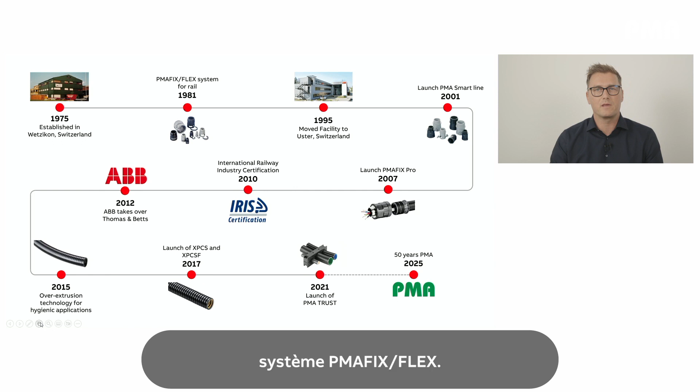ABB PMA, with the former name of PMA Electro Ltd, was founded in 1975 by Werner Lanz. At that time, the company was founded not far away from here in Wetzikon, and the name means in German Produkte for machines, Maschinen, and Apparatebau equipment. Werner Lanz was not only the founder of the company, he was also the key driver of development of the first PMA flex system. The patent for this product was made already in 1977, and the product was introduced to the market in 1981. This system solution, which was unique at the time, has become established in the market and has been adopted many times by other market competitors.

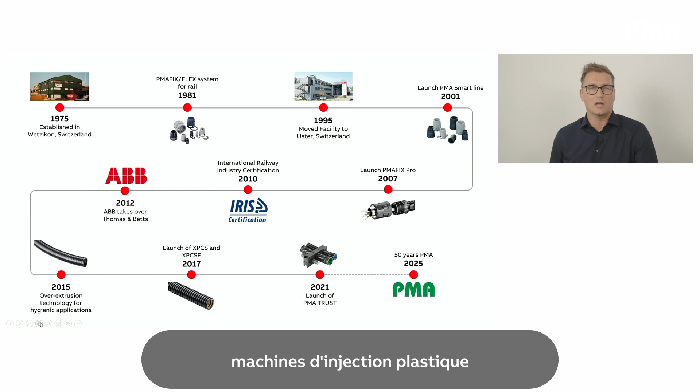In 1987, the company had about 20 employees and grew so fast that in 1995, PMA had to move to another building, which was actually then the building here in Uster, where we are still located. The property then was not as large as it is now. We had fewer buildings, and the company was growing over the years. The machinery in 1995 consisted of 7 injection molding machines and 4 extrusion lines.

PMA has then changed ownership several times over the years. In the beginning, Mr. Lanz was the owner of the company. Then Fränkische Rohrwerke was involved as a shareholder. After that, PMA was owned by the German Quant Group. Then it was sold to Thomas & Betts, and they in turn were bought by ABB. Since 2012, PMA now belongs to the ABB Group, and it's now known as ABB PMA Uster.

Today, ABB PMA can look back on a very successful history. Many good products have been developed and brought to the market. The company is consistently growing. Today we have 130 employees, and we produce with 18 injection molding machines approximately 15 million injection molding parts, and we produce with our extrusion lines more than 12 million meters of conduits. In 2025, we will celebrate our 50th anniversary with our great employees who make sure every day that we have a superb product and that we make our customers happy. We are confident that we will continue to make new history, and we look forward to moving our company into the future.

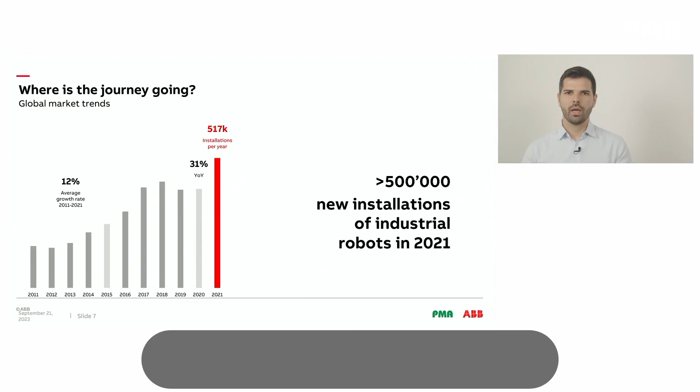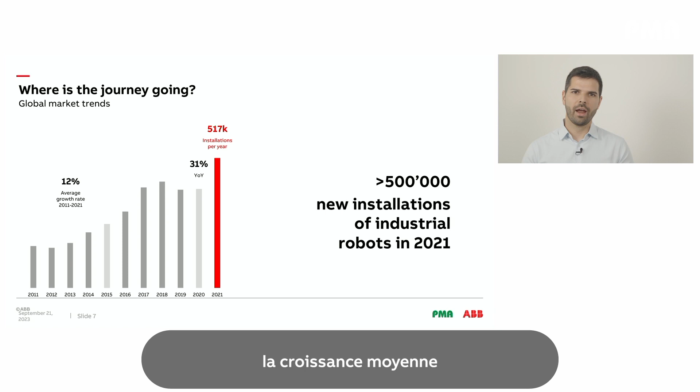Until 2021, the total new installed robots was more than 500,000 globally. During the last several years, the average growth was more than 12%, meaning the operational stock on the market is also growing, by more than 15% in percentage. If we look at the slide here, it shows really in which areas this is happening.

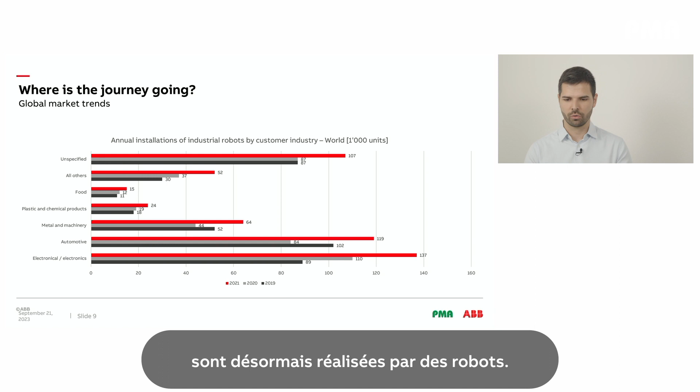But if we look in more detail, where are robots actually installed? A lot of people always talk about the automotive industry and so on, but in general there's a big group that's actually unspecified, where the robot manufacturer doesn't really know where they're installed. This means a lot of applications and new jobs now involve installed robots, and this is actually the market trend.

New areas are being explored, and robots are being installed in new areas that weren't really the focus in the last couple of years. This means the market trend is going in the direction where price pressure is increasing, due to inflation but also due to population changes. In some areas the population is getting older, and to ensure the productivity of the country and of manufacturing stays at a consistent level, automation is a solution to this problem.

On the other side, as I said, the price structure is also under pressure, so automation and robotics is also the solution there, as well as for uneven global solutions and increasing pressure due to globalization.

This means that smaller robots, like cobots and so on, are going to get bigger, so the capacity is increasing. But on the other hand, industrial robots are going to get smaller and smaller. This is shown in new product launches in the robotic segment, like the new IRB 1100 from ABB, or on the other side, the new GoFa 12 and 10, also from ABB.

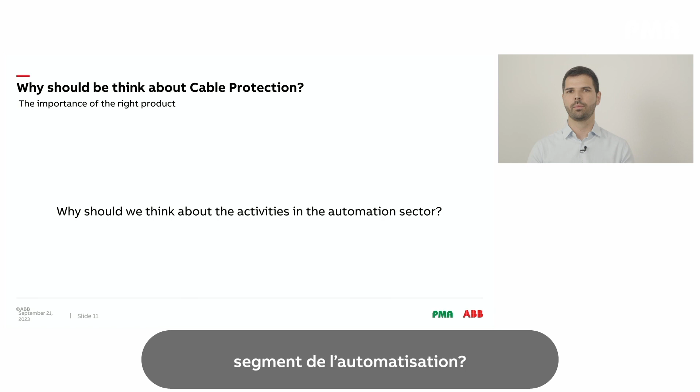But if we talk about cable protection, what does it mean actually? Why is it so important, and why should we think about our cable protection in the segment of automation? Why is it so important to choose the right product for this particular application, and what does it mean? It's because it can save a lot of money and it brings a lot of value to the customer, to the productivity of the manufacturing, and at the end, the end customer gets the product which he's looking for.

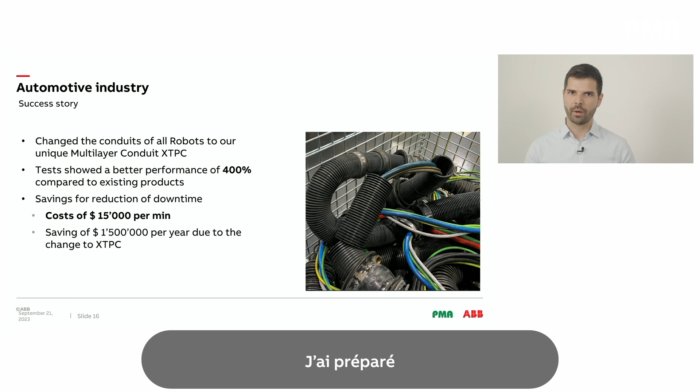For example, now if you talk about money, $1.5 million per year. What does it mean actually? I have prepared a success story for you, coming from the automotive industry. We changed the conduit from a competitor to one of our unique multi-layer conduits, the XTPC, and we could improve the productivity and performance of the robot itself by 400%.

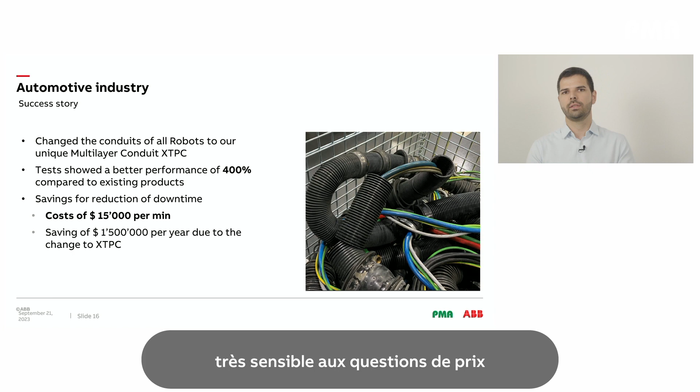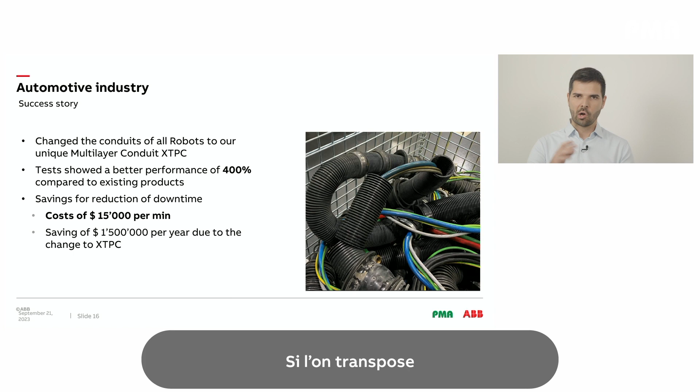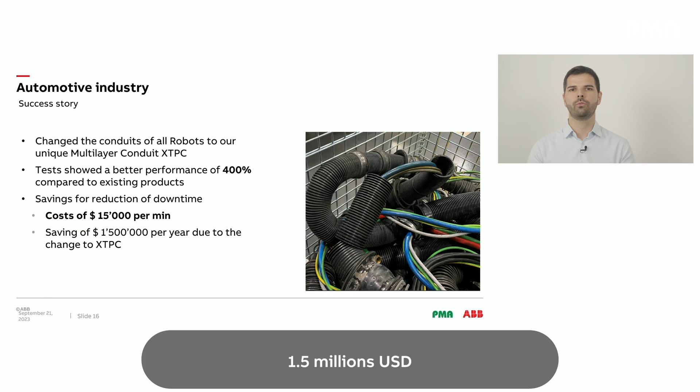Automotive industry is really price sensitive, and downtime has a direct influence on the cost. That means $15,000 costs is incurred if the robot is not working, and this per minute. Calculating this up, we from ABB PMA could save our end customer $1.5 million per year.

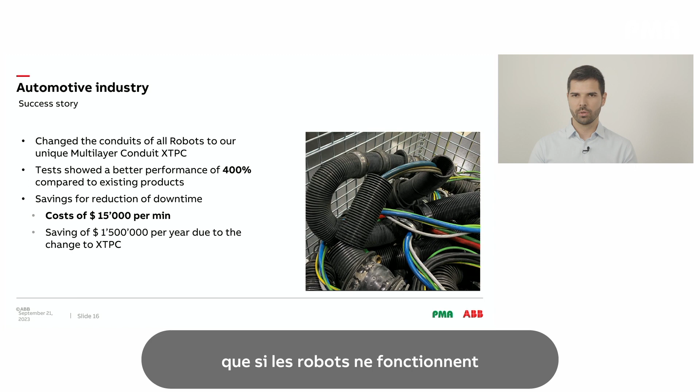And this is really a high number, and it shows as well, as you see in the picture, if robots are not performing as they should, the setup is not properly made, the conduit is not chosen for the right application, and the constellation of products is not chosen wisely, it has a direct influence on costs, and at the end, on the productivity of the factory itself.

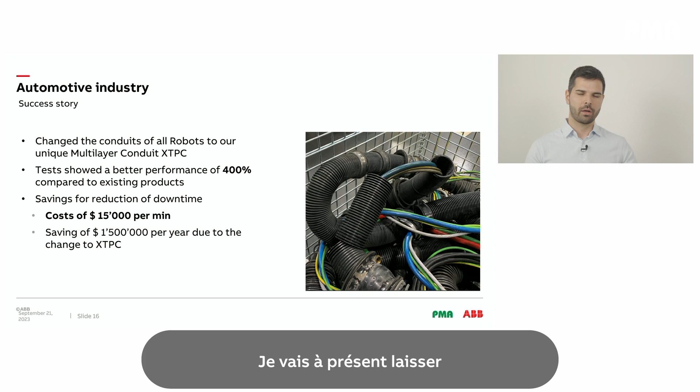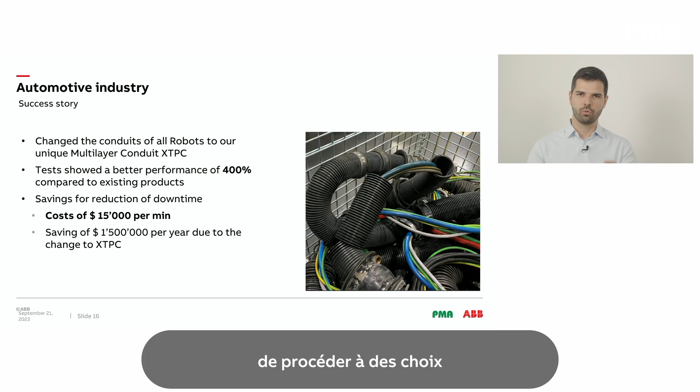And now my colleague Mo will introduce himself and show what our solution is to this type of problem, and why it's so important to choose everything wisely and correctly. Thank you very much.

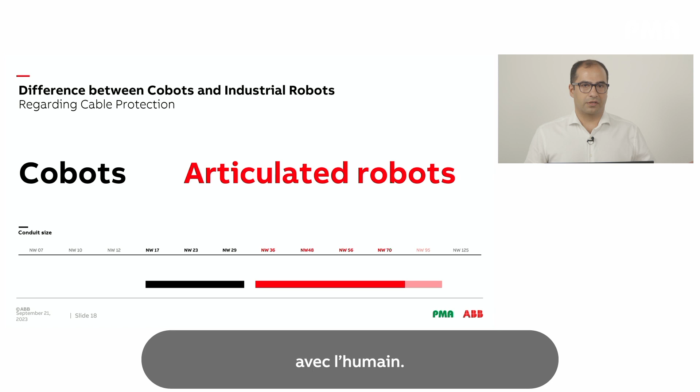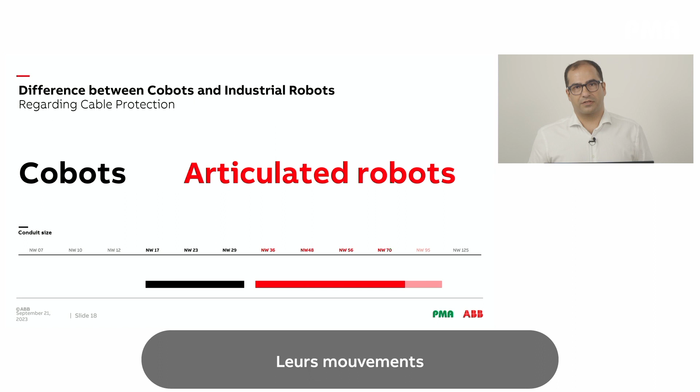They are among us, much slower, and can learn quickly. Articulated robots are the industrial ones, very fast, moving quickly. The mechanical loads and mechanical situation on the cable and cable protection system for articulated robots are much stronger and more difficult to handle. This is why we have solutions for articulated robots that are more robust than for collaborative robots.

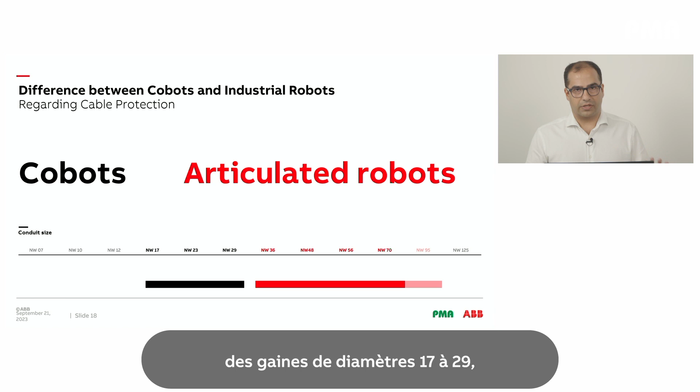When it comes to conduit size, we have for the cobots a smaller range, from conduit size 17 to 29. And for the industrial ones, we have the larger range, from 36 to 70. For some applications, also 95.

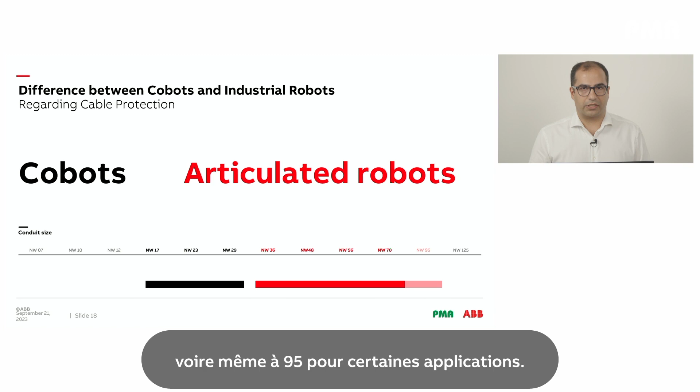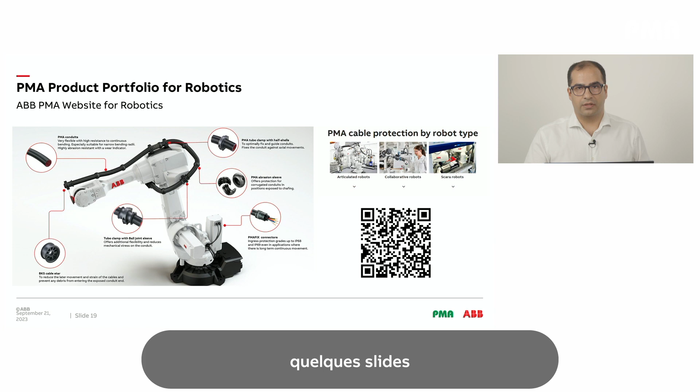But nevertheless, I just want to show you a few slides on what we have to offer you in these 2 categories.

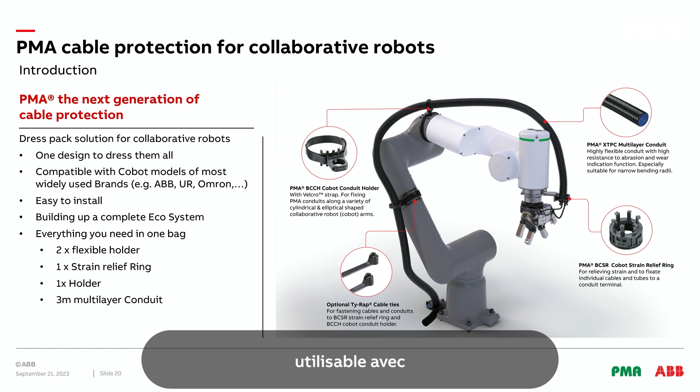For the collaborative robot, our design strategy and the most important factor was to have a solution that addresses the needs of all types of collaborative robots. Here, the key factor is compatibility. We want to have one solution that you can use with several manufacturers, several OEMs, and keep it very simple. That's the most important point.

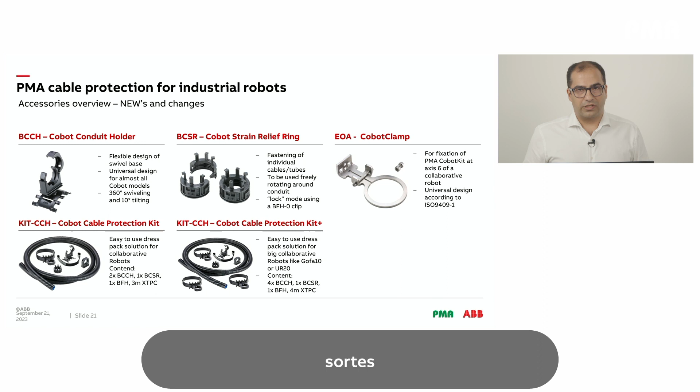This is why we have also two kits, the smaller one and the bigger one, that are compatible with many types of manufacturers of cobots. For sure you could also have single products, not only the kits, but also things like the clamp for end of arm, conduit holders, or different sorts of accessories or conduit itself. But with this kit, you just get a box, easy to install, and you have everything you need for your cobot.

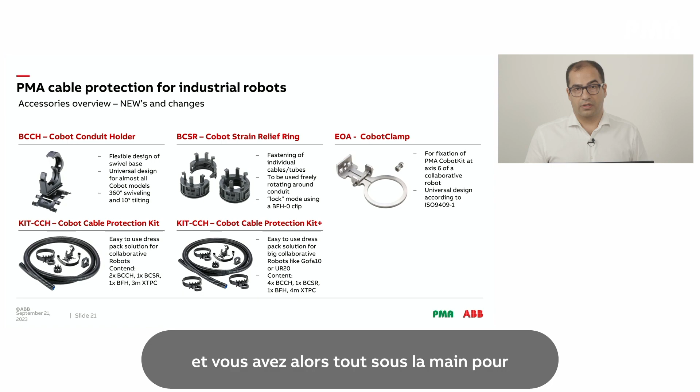All right, if I want to talk about our industrial robots, as I mentioned, the mechanical load is much higher. They have a lot of torsion, a lot of bending. They are going very quickly. This is why we need very strong and very solid solutions when it comes to the conduits.

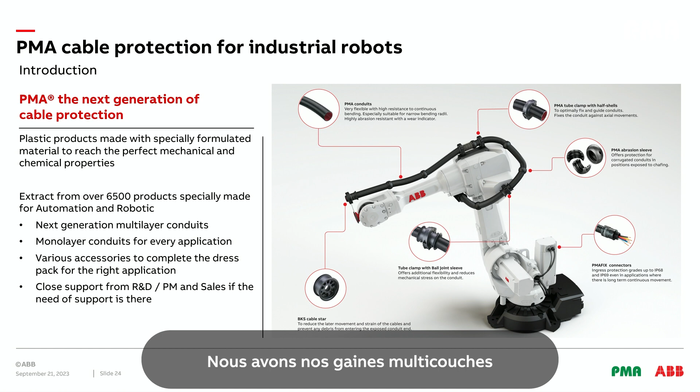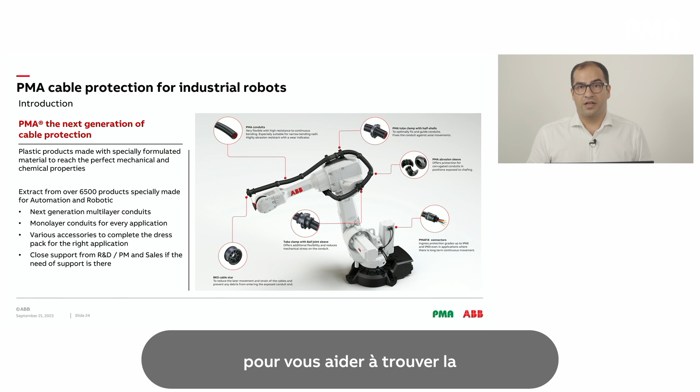We have our multi-layer conduits that my colleague Slavko mentioned about. We can have a look later on to that. And for sure, we are here to support you to find the right solution. As I said, we have a very strong team in Uster. Just contact us, talk about your application, and we are there to support you to find your best solution to the application that you are addressing.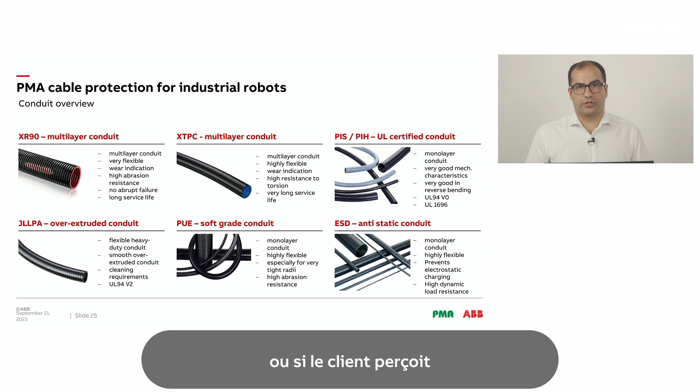Regarding the products, our multi-layer solution is our preventive maintenance solution. What does it mean? If we see the first signs of wear, or if the customer sees the first signs of wearing on the conduit, they see a change in the color. We can do it not only with two layers, but multiple layers, so you have a multiple alarm system visually to know when you need to change the conduit before it comes to a stop of the production line. This is very important. We have different formulas and different solutions to make sure we have the best mechanical property when it comes to torsion or abrasion.

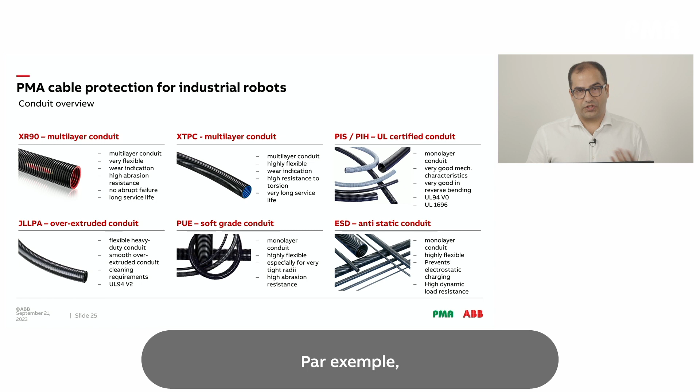We also have several certificates for the American market. We have UL certified products. We have our over-extruded solution that makes cleaning the conduit very easy. And also we have specific applications - for instance, if you need more elasticity or more flexibility, we have our PUE solution.

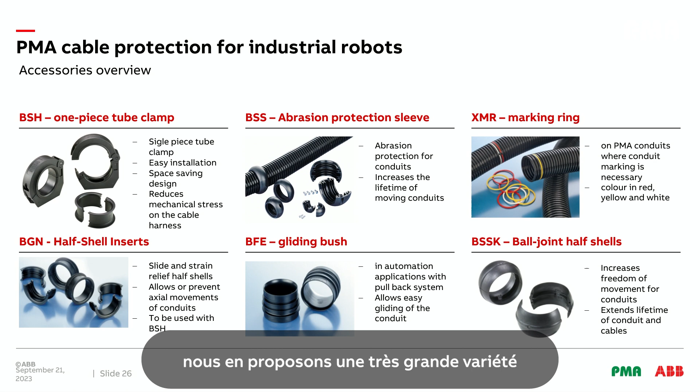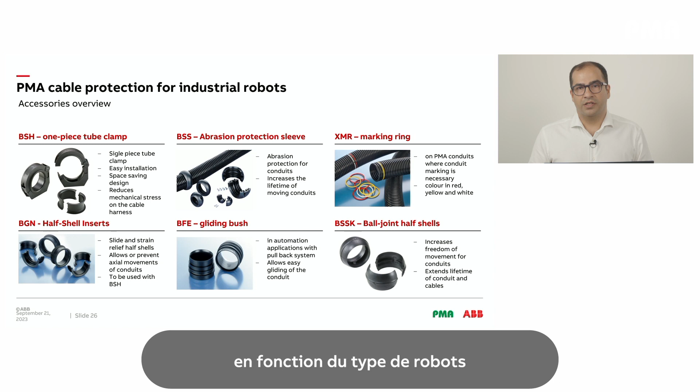When it comes to the accessories, there are loads of accessories to cover all the needs you might have. Here I want to mention our anti-abrasion protection sleeves. These products make sure that the conduit is not affected by wear and friction. They are much easier to change than the whole conduit, so they help a lot to make sure the conduit itself is in good health. And we have several clamping systems based on the type of robots you might need to use, and also ball joints or the gliding bush.